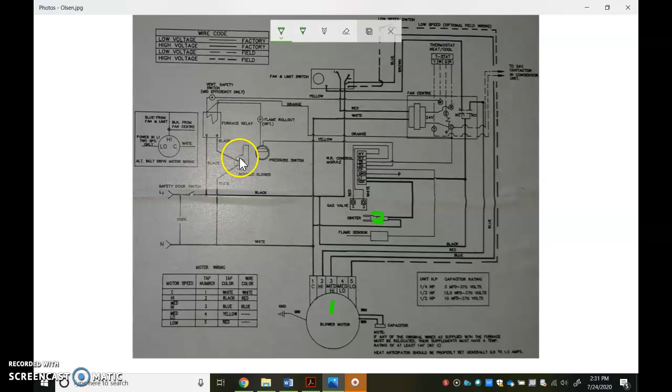The first thing I'm going to do, and you should do, is identify the 120 volt load. So I'm going to take a pen, green pen here, and I'm going to identify the 120 volt load. So obviously we got one right here, which is the blower motor. The igniter is a 120 volt load. That's number two. The induced is called the induced blower, which is a venter or exhauster. That's number three. And this transformer here that is in the fan center is number four. There are four in this diagram 120 volt loads.

So let's now identify with orange the 24 volt loads. A 24 volt load is something that does work when you give it power. Here's one right here. That is the gas valve. The second one's the ignition control. This is number two. The third one, which might be the last one, is actually this furnace relay. This is a coil here, okay? So we got power coming in, and it goes through that coil and comes out, goes back down to the C side. So if you want to try and identify, so we'll put a number 3 here, okay?

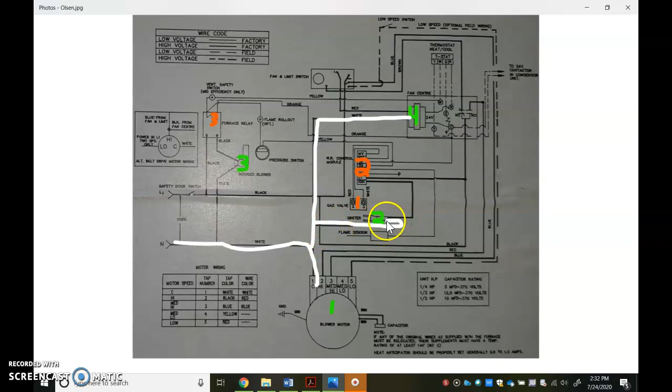So let's go back up here, and I'm going to trace with white wire all of the neutrals. The neutrals should go to all four of these loads. 1, 2. Okay, I screwed myself up here. Oh, there we are. 3, and 4. So since you have a neutral to each one of those, we now need switches to turn each one of these on. Okay. We should also have the neutral, if you want to call it that, for the 24 volt side is called the letter C.

So we should have, oh, I did forget one thing. Let's go back here. Let's go to orange. This is the fourth load on the 24 volt side, and it is the coil for this relay. It's energized when you close R and G at the thermostat. It powers this relay and switches these switches. So we can now identify what loads are being powered by what switches.

So let's take a look at the switches that are powering the 120 volts. So the 120 volts are green, so we'll go back to green. What switches? Well, this is a switch right here. So we'll call this number 3, and that's power coming in. When this is energized, it closes this switch and powers this guy here. The igniter is powered through, let's follow the black wire. So this black wire comes up here, comes and powers this guy. This black wire here jumps over there, comes up, and powers into the bottom there. It also comes down and sends power to the ignition control. Ignition control decides to send power to him there.

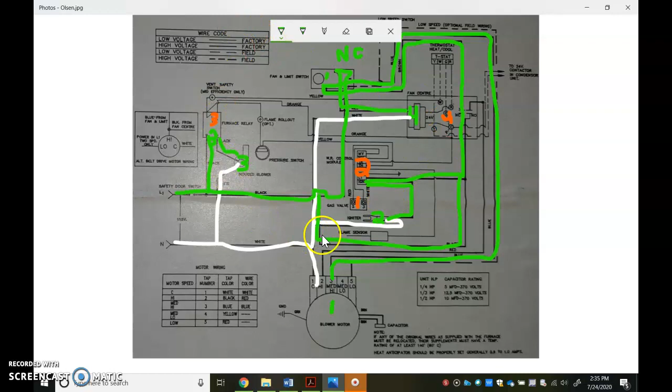When you draw out your diagram, we also have to figure out what 24 volt switches turn what on. So let me switch this over back to the orange. 24-volt switches. So R and W is a 24-volt switch. When you turn R and W, W sends power through a vent safety switch and to this furnace relay. This is a load. So this load goes back to C. See this guy right here. Yep. So this guy comes, jumps over that, comes here, bing, bing, bing, down to C. So R and C are the power, switch, switch, load. That load closes that switch and turns on that motor.

There also is power coming out of this guy through the flame rollout, waiting for the pressure switch. The pressure switch closes when this guy gets energized. When it closes, it sends power over to the ignition control, the TH on the ignition control. When TH on the ignition control gets powered, the first thing it's going to do is turn on the igniter, 30 seconds, whatever, and then it will send power through the main valve to the gas valve. The gas valve goes back to C. So you will see here, there's your TR, which is your transformer back to C. Once it lights the gas, the flame sensor senses the flame.

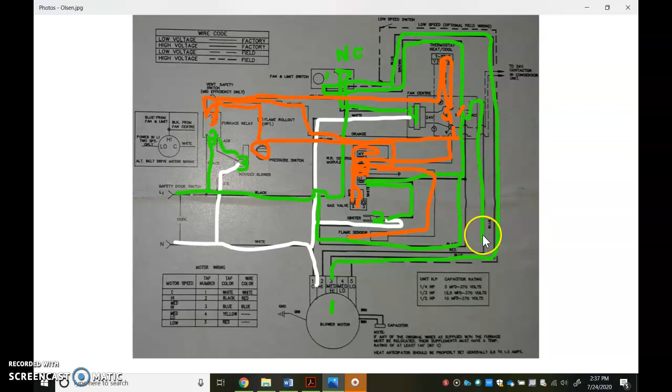You notice that we have most everything taken care of except for when you want to run air conditioning. This is where the fan center comes in. When you want to run air conditioning, R and G close right here. When R and G close, it powers this relay here. That relay switches this guy. It opens that and sends the power. I'm going to switch back to green. Oops, right here. Sends power through this now closed switch down through and powers the high speed. That way you'll never power high and medium high at the same time.

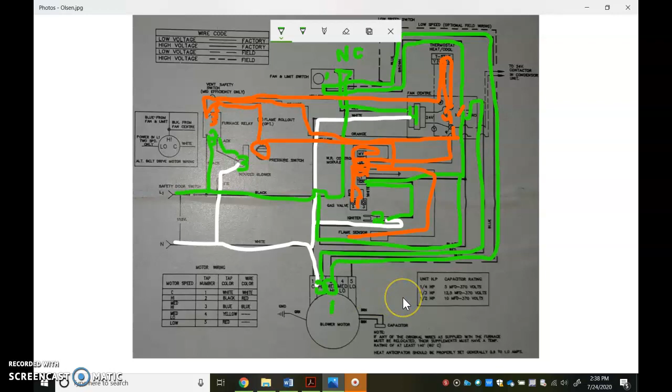Okay, so this is the explanation of your wiring diagram. I will come up with a quick video on how to draw it out, but if you look really hard and open up your Simugas furnace software and take a look at the electrical diagram, you will see that it is very similar to what this is going to look like. So you can use that as a template. All right, so one more video will come on how to draw out a ladder diagram.